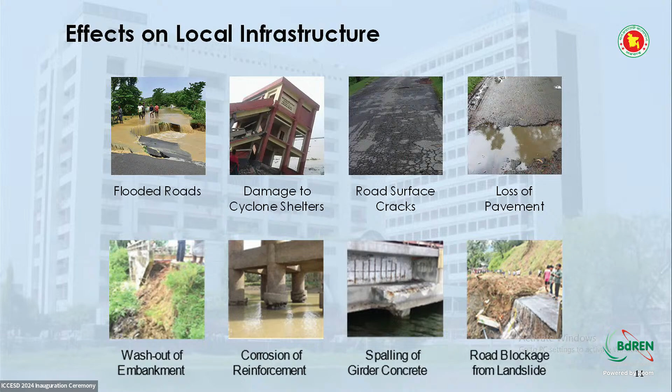Major climate resilient rural infrastructure projects. Recently, the government and also the development partners like World Bank, ADB, JICA, USAID, KFW, so many - even 26 development partners are working in LGED on different development projects.

To face the challenges evolved by the recent climate change impact, LGED is not sitting idle. LGED has taken initiative to integrate climate and disaster resilience in infrastructure design, implementation procedure, and also

by this time LGED has developed new design standards addressing all climate change issues and developed an asset management policy system.

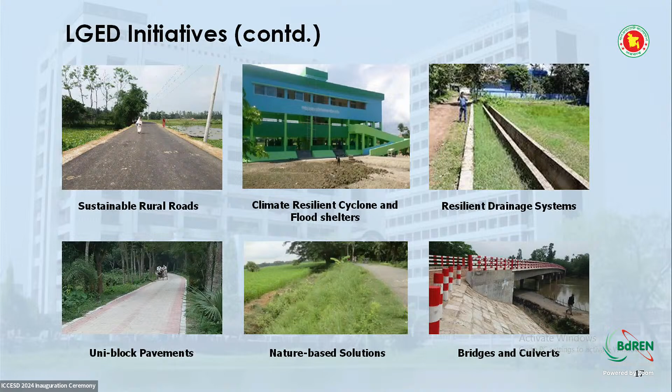Others - nature-based solutions like vetiver grass, we provide on the slope, but it is not much popular. The engineers actually working in the field are not much interested to use vetiver grass. The problem is also there because not everywhere are these grasses available. It is not much expensive, not cost involving. That's why many of us are not interested, on the contrary much reluctant to use vetiver grass alternatives, the nature-based solution.

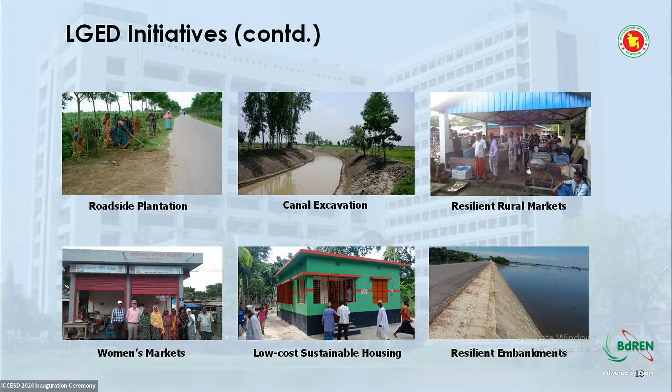You see in cyclone shelters what type of materials we use, which are very much climate resilient.

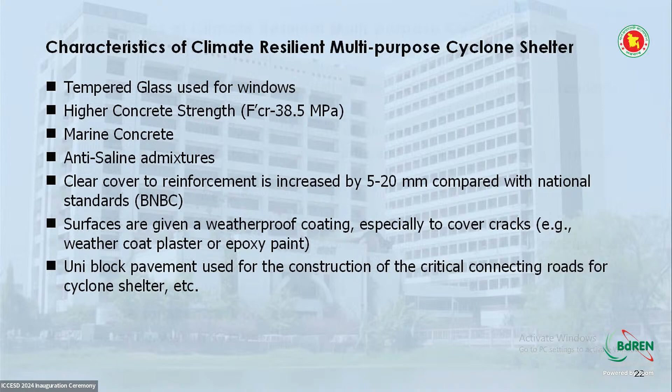And this is all. Actually, I'm not a professional on this particular subject. And I would say, thank you all.

Thank you, everybody. Thank you very much, Engineer Muhammad Ali Akhtar Hussain, for your nice presentation. We have learned few important things from his presentation, how LGED is considering sustainable and resilient development approach for their infrastructure development, which has significant contribution towards the poverty decrease of Bangladesh. He has also mentioned there are few challenges to accomplish these targets. Now, I would like to invite few questions from our audiences.

The open discussion, or you can have any question or observation, please. Assalamu alaikum, I'm Ashraful Alam, Director General HBRI. First of all, I congratulate and give many thanks to the keynote speaker, Mr. Ali Akhtar, Chief Engineer LGED, for his nice presentation. My question is...

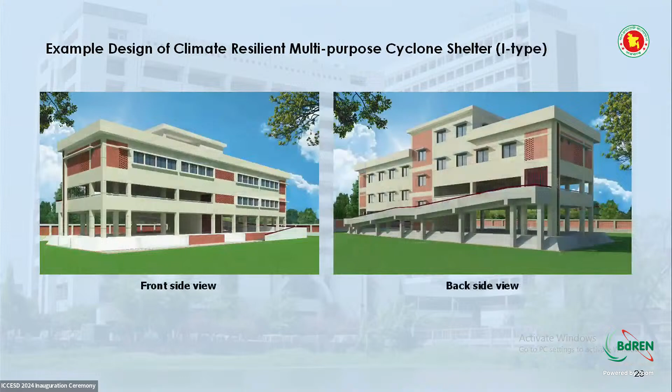As you know, the present government's 2018 election manifesto was Amar Gram Amar Shahar - that all the villages will be like the town, that all the villagers should get all the facilities which the urban people get. But in your presentation, these 5 years, as per the government manifesto, the government decided to increase the villages to convert into urbanization. But in your slide, the result is negative. What is the reason? Do you have the source of that result? Thank you.

Thank you so much, Mr. Ashraf. Reason, definitely, there are some reasons. One of the reasons is the intrusion of rural poor people to the cities. It is actually decreasing because of maybe erosion, less saline affected area. Salinity intrusion, recently, is not taking place. In Satkhira, Bagerhat, 10-15 years before, it was very much acute, and scarcity of drinking water. Maybe the migration of the rural poor to the city areas took place very seriously, but recently, last 10-15 years, we did not see much erosion or much saline affected areas.

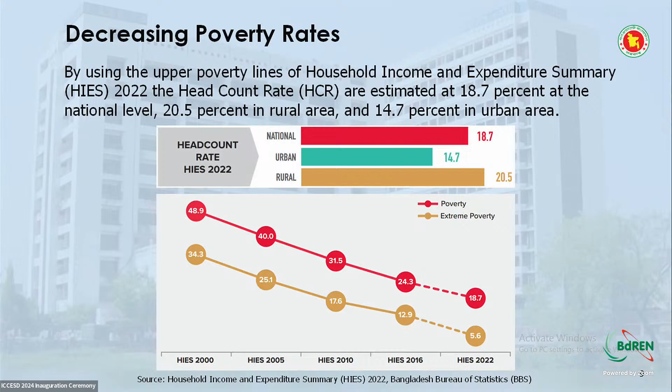Sir, I would like to supplement. This is Mohammad Jamanur Rahman, Superintending Engineer, Department of Public Health Engineering. In response to the question of Mr. Ashraf, I would like to supplement with you. Sir, you are very correct - urbanization is not directly related to the other factors.

We are working for supplying safe drinking water for the coastal people. We are targeting 4 parameters: one is Smart Bangladesh, second is Amar Gram Amar Shahar, third is SDG 2030, and the last one is 2041, in which you will achieve developed country status. The government of Bangladesh is investing a lot of money. At present, DPHE is operating one project of cost around $1 billion, 8,850 crore taka, in order to achieve the SDG, as well as Smart Bangladesh, Amar Gram Amar Shahar, and Vision 2041.

Moreover, the government of Bangladesh puts great concentration on supplying safe drinking water for the coastal people. For this we are implementing three special projects for the coastal people to ensure safe water supply. You are very correct, that is why the migration from coastal areas, rural areas, or interior remote areas is less. And another, the third one is maybe the income generation - income generating activity is also increasing in the rural area.

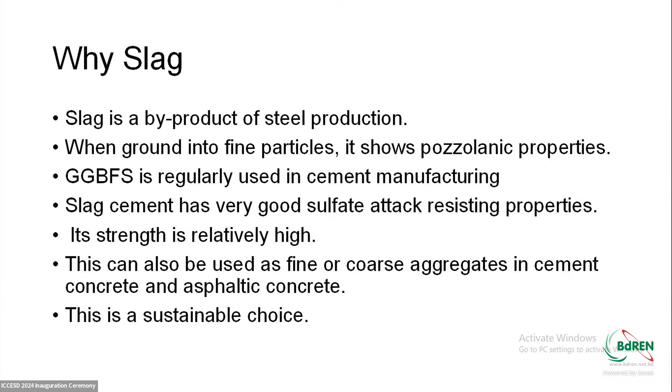Now, why don't we have any blast furnace slag in Bangladesh? Because everything is in Bangla. Why? I don't know. There's something wrong, anyway, I don't know. Can you change the font? Just select it and change the font. No, I didn't write it in Bangla, it was in English, so go to home and change the font type.

Anyway, I'll explain. There are two routes of steel production: one is primary route and another is secondary route. Primary route is where steel is produced from iron ore, collected from iron ore, and that is the primary route. For primary route steel production, a blast furnace is needed.

Another is the secondary route, where steel is recycled. Scrap is used as raw material for steel production. In the present-day world, 90% or more of steel is produced via the secondary route because that is more environment friendly.

In secondary route, a great quantity of furnaces are electric arc furnaces. In our subcontinent, induction furnaces are also used, but the majority of furnaces for secondary route are electric arc furnace. In that process, for further refining, ladle refining furnace is also used.

Now, the problem is why blast furnace slag is kind of a standard to be used in cement, because of its chemical properties and chemical composition that can be more controlled. The problem with electric arc furnace and ladle refining furnace slag is that since the raw material is scrap, it depends on the type of raw material used to produce the steel in the secondary route.

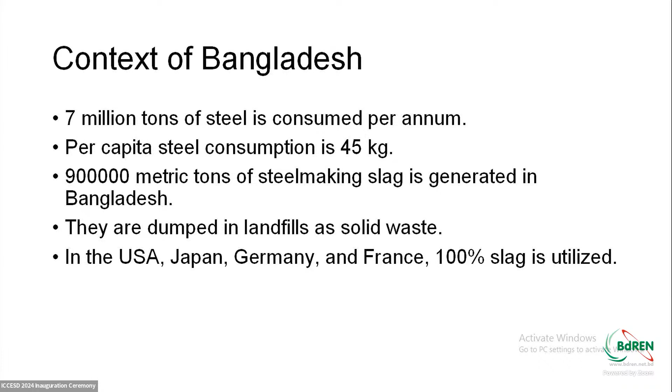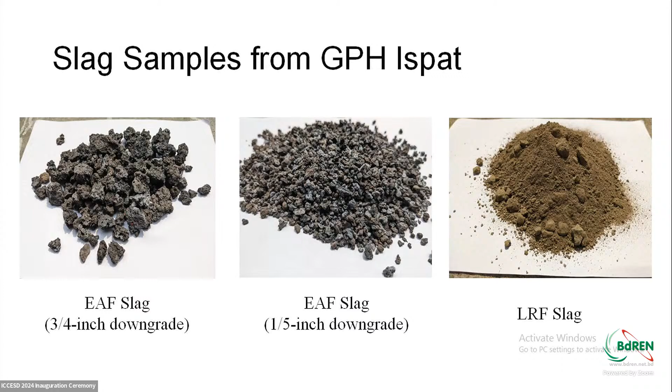Now the slag we collected was from GPH Ispat; the collaboration was with GPH Ispat. The electric arc furnace slag was crushed in different sizes, like 3/4 inch downgrade and 1/5 inch downgrade, and LRF slag was collected in powder form. We used XRD, and found that for electric arc furnace, a great portion of the component was iron oxide, like magnetite, wustite, and some silicon oxide.

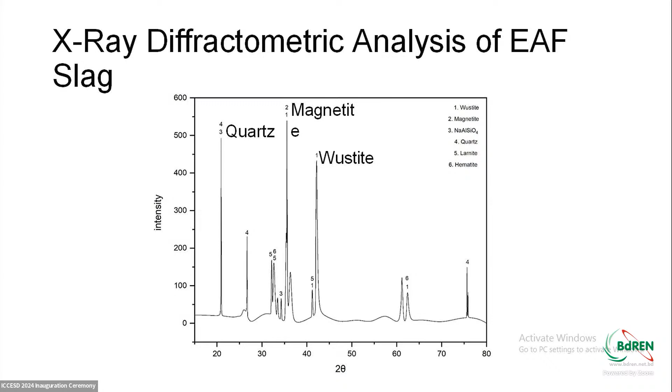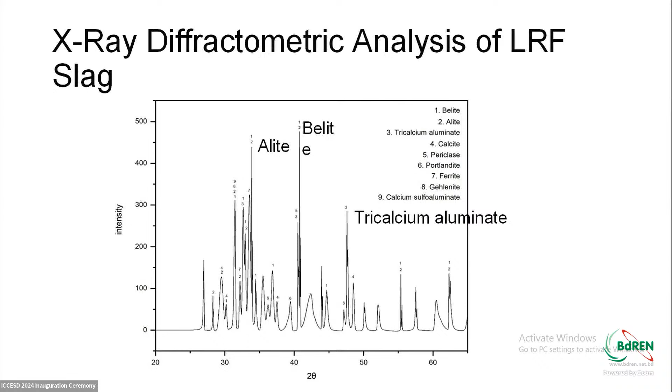We'll show other components too. For LRF, interestingly, it has chemical composition very similar to clinker. It has belite, which is dicalcium silicate, and alite, which is tricalcium silicate, and tricalcium aluminate, which are also the compounds of cement.

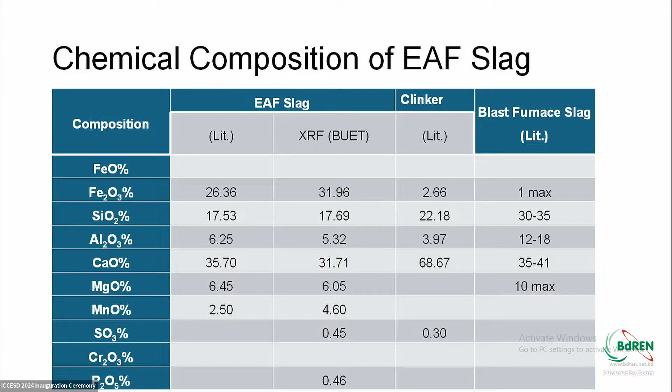Now, if we compare LRF, we find there is very little amount of ferrite. The majority is lime and some silica. If we compare with clinker, this is comparable, LRF slag.

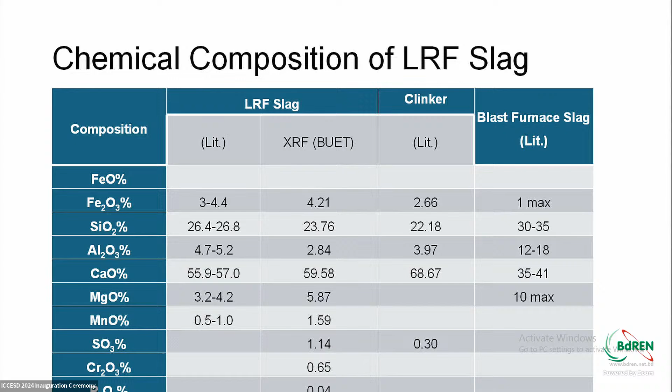Now, we tried to utilize the slag, LRF and EAF slag, in cement production. The process was like this: with clinker, gypsum was added, then slag was added in powder form. Both EAF and LRF slag were pulverized, and the particle size was lower than 150 micrometers.

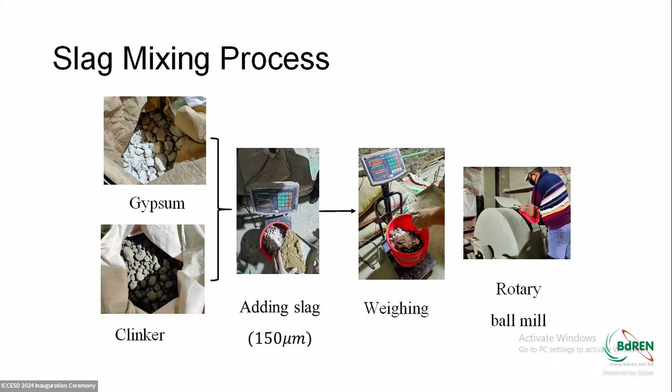It was then added in different quantities depending on the mix design. In a small rotary ball mill, we mixed this gypsum, clinker, and slag. So the final product was cement.

The mix design was like this: clinker was replaced by 5% to 30% LRF slag. In sample number one, there was no replacement, gypsum only. In samples 2 to 7, there was replacement by LRF slag from 5% to 30%, and in samples 8 to 11, clinker was replaced by EAF slag from 5% to 20%.

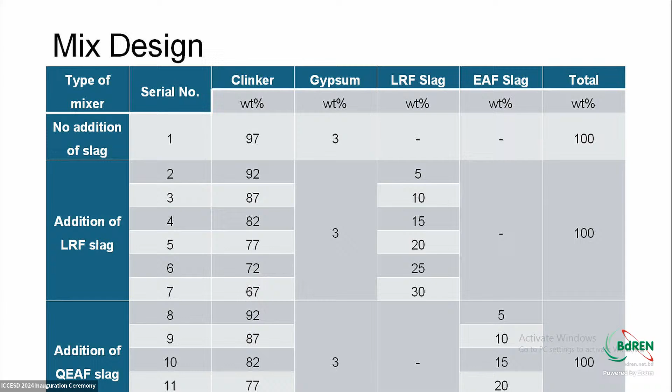Now, after replacement, the chemical composition became like this. In LRF, the ferrite percentage was comparatively less. And we see that when EAF slag was used, ferrite percentages increased with higher portions of EAF slag.

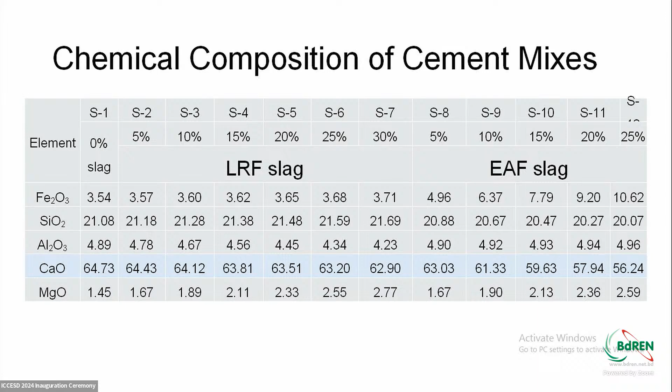And if we see the lime percentage, it remained relatively similar to clinker in case of LRF slag, but lime percentage was reduced in case of EAF slag.

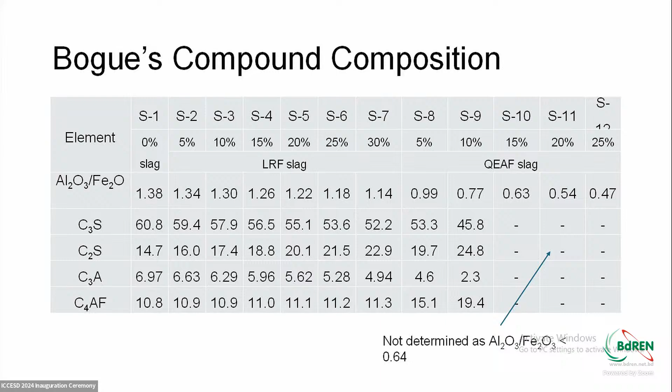Now, if we calculated the bogue compounds, that is belite, alite, aluminate and aluminoferrite of cement, for LRF slag they were all within permissible limits, but for EAF slag, which is electric arc furnace slag, the ferrite aluminite percentage was so low that ultimately other compounds could not be determined, because the formula we used required that the aluminate ferrite ratio must be greater than 0.64.

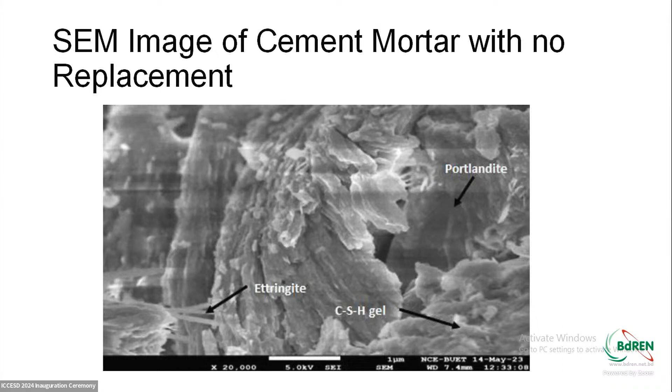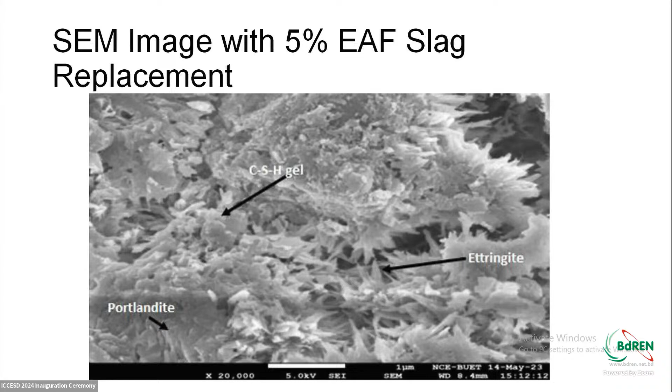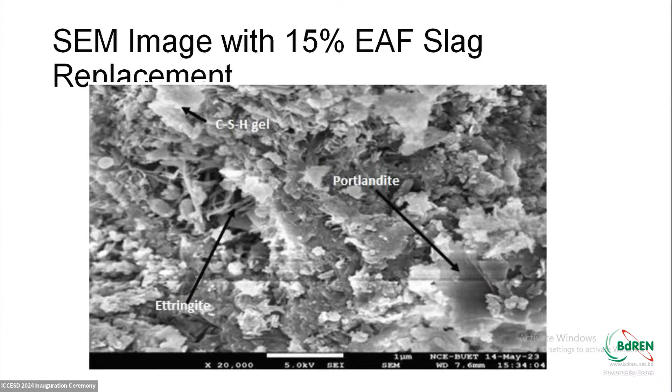So now when we replace with 5% EAF slag, we can see that ettringite is more predominant. CSH gel becomes a little less. Portlandite is also observed. Then with higher percentage of EAF slag, the amount of Portlandite actually increases, which shows that the material is becoming more heavy, density is getting higher. But after a certain amount of replacement, it may show expansive property, which is not good for durability. Similar nature is found in 15% replacement of EAF slag.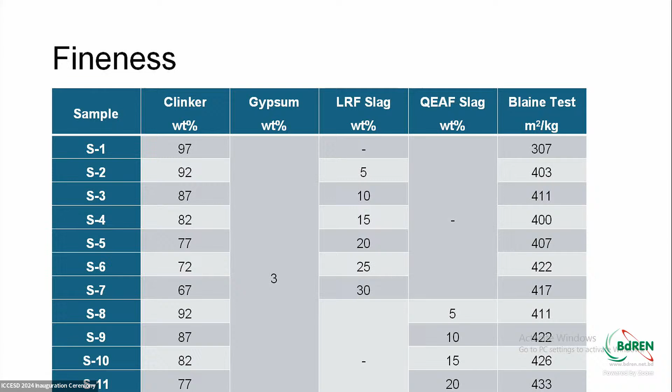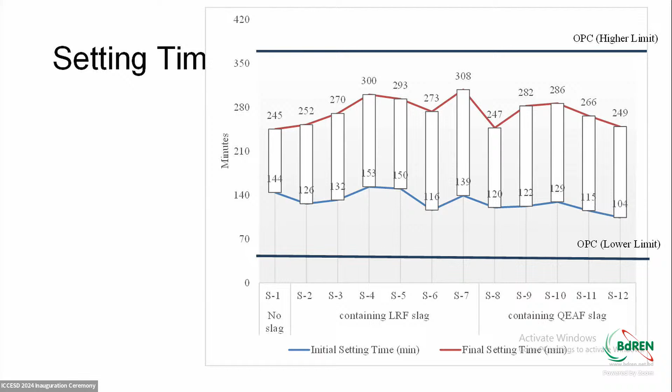Setting time, we measured setting time. It was within the limits, even for OPC, ordinary Portland cement limits. Soundness was also within the limit, but if we increased the EAF slag more than 25%, then it becomes a problem. Expansive properties are then observed.

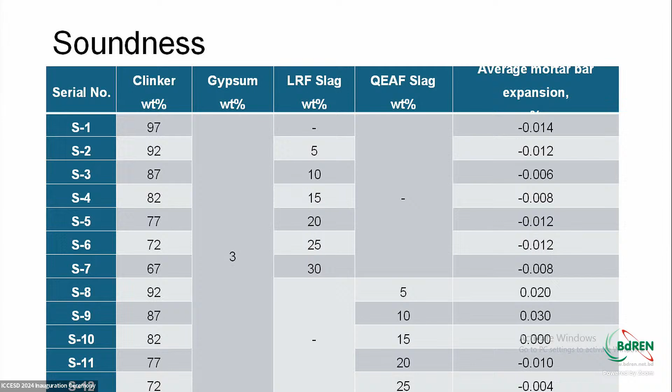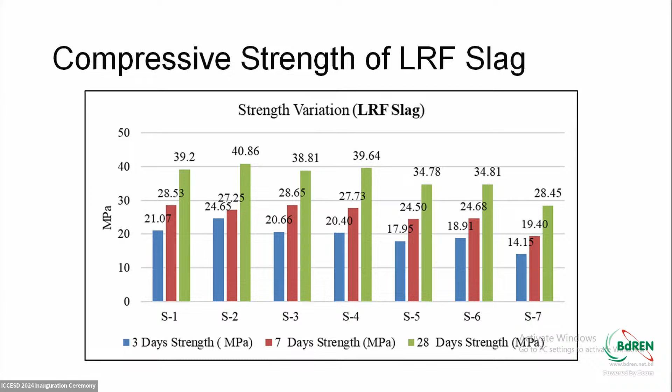In terms of strength, we find that with higher percentage of slag, strength actually decreases, but we can achieve comparable strength with OPC with up to say 15% replacement of LRF slag. In case of EAF slag, again, strength is comparable, but it decreases much more with a higher rate, with higher amount of EAF slag. So both LRF and EAF slag can be used as replacement of clinker without adversely affecting the cement properties.

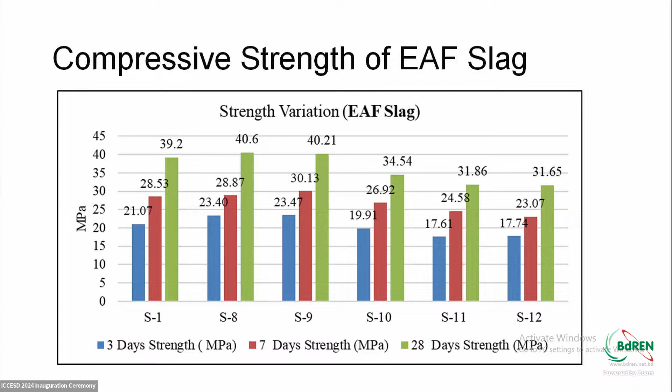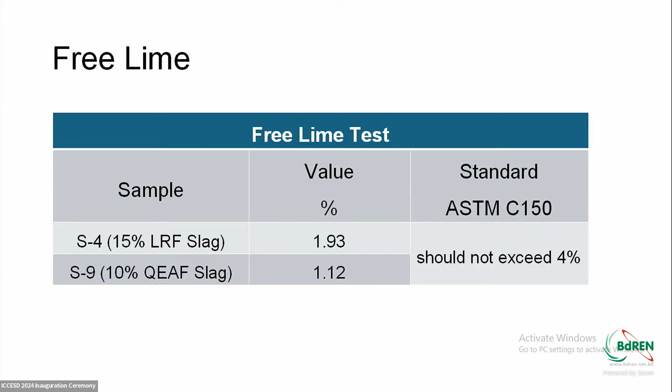But LRF slag is much more chemically similar to clinker. In literature, we found that free lime is a problem for slag, particularly for LRF slag, but we found that for our samples, that was within limit. And loss on ignition was also within limit. So that was all about clinker replacement in cement.

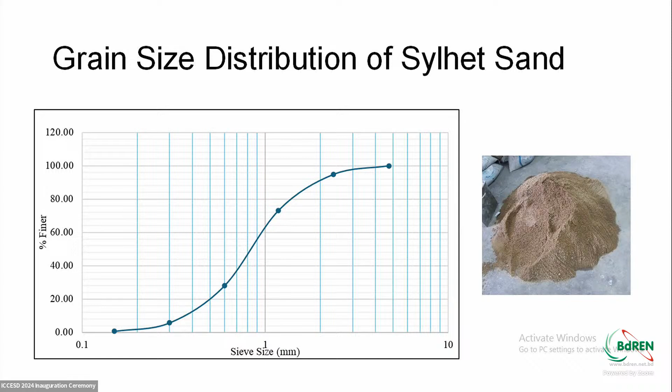Now, we also studied if EAF and LRF slag can be used as replacement of fine aggregate or coarse aggregate. For that, if we see the grain size distribution, this is the grain size distribution of Sylhet sand, and the samples we used for fine aggregate replacement of EAF slag were much finer compared to Sylhet sand, which is not good.

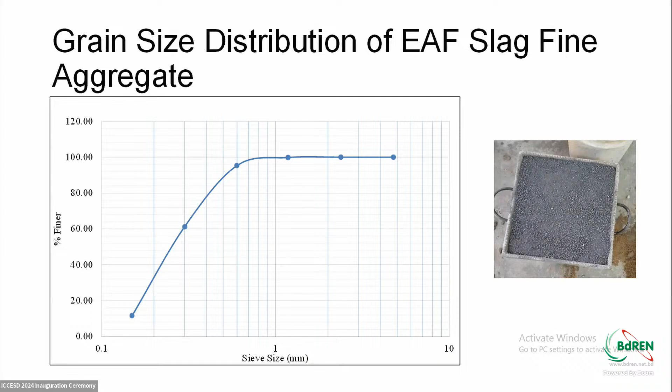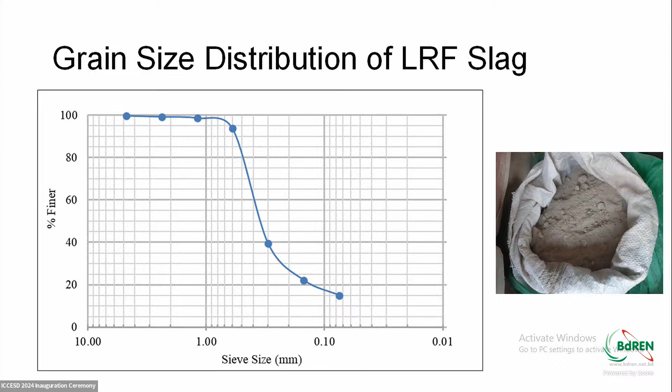And LRF slag was already in powder form, and we can actually make coarse aggregate with EAF slag, but with LRF slag, coarse aggregate is not possible; it is always in the powder form. So LRF slag can be used as replacement of fine aggregate or as clinker, but not as coarse aggregate. Again, the particle size is much finer compared to Sylhet sand, which is not good.

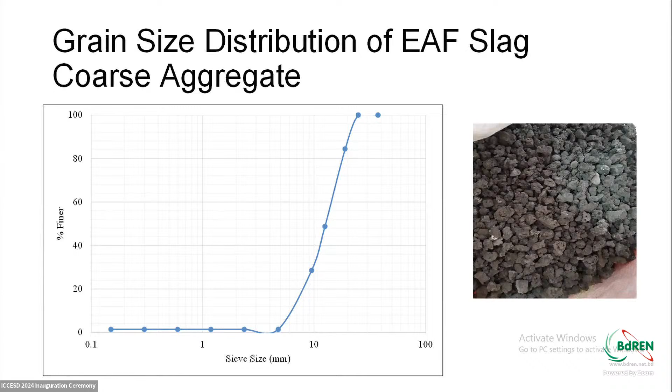For stone chips, this is the grain size distribution, and only EAF slag can be replaced as coarse aggregate. Grain size distribution depends on how we crush it, so grain size distribution can be similar to stone aggregate. And then we use different mixes.

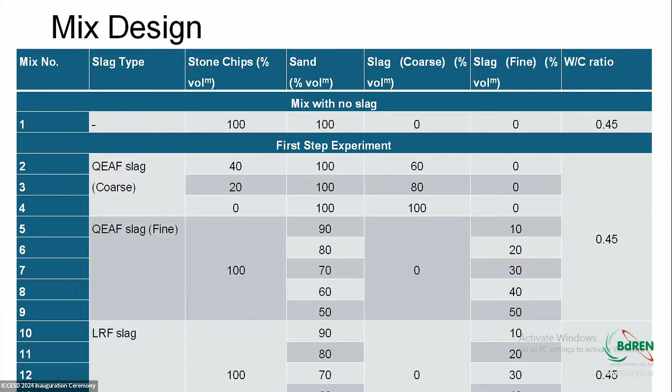In our first trials, what we did is without any replacement of stone or fine aggregate, and then we replaced with EAF slag. We used 60% to 100% slag in replacement of coarse aggregate. For fine aggregate, we replaced 10 to 50% of sand with EAF slag and 10 to 30% of sand with LRF slag. In all cases, we kept water cement ratio at 0.45.

Then in our second trial, after getting some experience, we used EAF slag, replacing both coarse aggregate and fine aggregate in different proportions, like 80% replacement of coarse aggregate and 5% replacement of fine aggregate, and so on, and 100% replacement of coarse aggregate with 15% replacement of fine aggregate together.

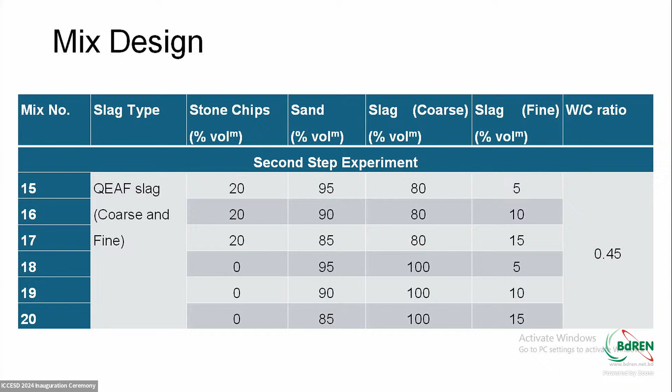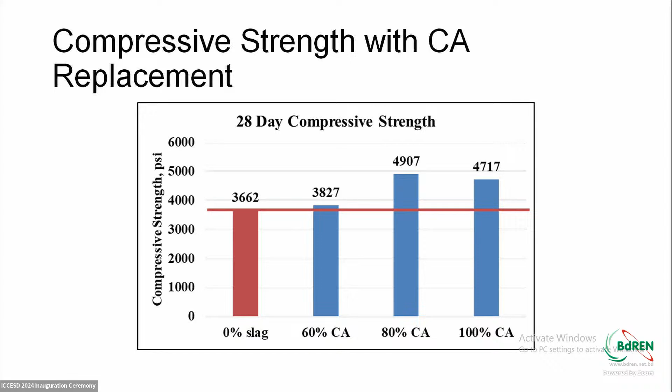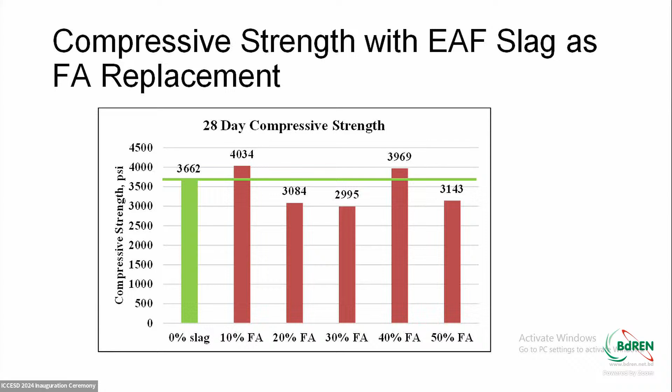What we found is that when we replaced coarse aggregate with EAF slag at a higher proportion, the strength got higher, so coarse aggregate replacement was quite successful. But in case of fine aggregate replacement, it was not like that. It varied because the particle size of EAF slag fine aggregate was much less than Sylhet sand, so we didn't get very good results. The same is true for LRF slag too.

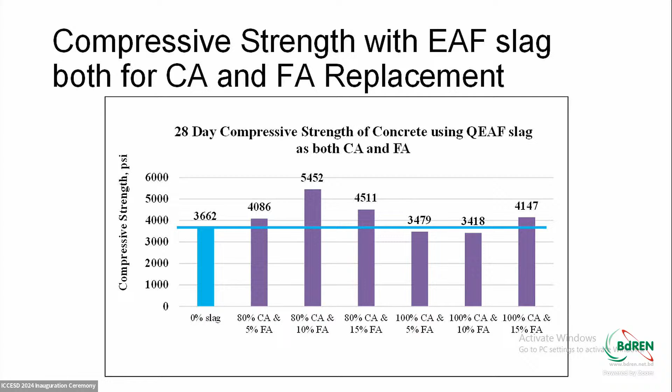So finally, what we can say is that even when we use EAF slag as replacement of both coarse aggregate and fine aggregate together, the result varied. So what we can suggest is that for coarse aggregate replacement, EAF is a very good choice, but fine aggregate replacement is not desirable, number one.

And in case of clinker, it can be replaced for cement production, both by EAF slag and LRF slag. But what we suggest is that since LRF slag has no other use, particularly as a replacement for coarse aggregate, LRF slag should be used for clinker replacement. And EAF slag can be used as replacement of coarse aggregate, both in cement concrete and in asphalting concrete. In asphalting concrete it's already very commonplace, so we were interested in cement concrete.

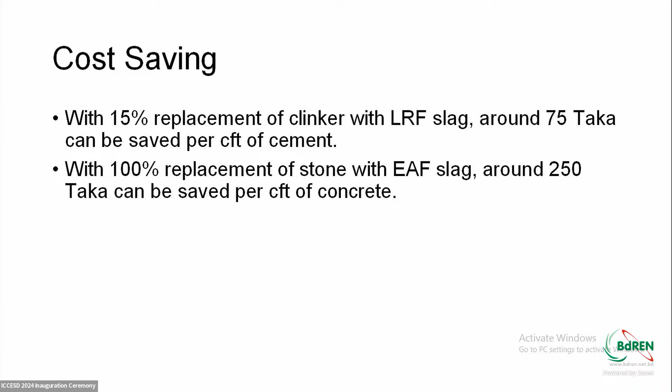So in terms of cost, this is a very rough estimate: 15% replacement of clinker with LRF slag may save 75 taka per CFT of cement, and 100% replacement of EAF slag as coarse aggregate may save 250 taka per CFT of concrete, which is huge, if we think that the slag is free in that case, because it's a byproduct waste.

Environmental aspect is the most important thing, which goes with the theme of this conference. I'll try to give some statistics here. Cement manufacturing is responsible for approximately 9.5% of worldwide carbon dioxide emissions. You all know construction is a very big contributor of carbon footprint. On average, the production of 1,000 kg of cement emits nearly 900 kg of carbon dioxide, and for Portland cement, nearly 1 ton of carbon dioxide is generated for every ton of cement manufactured.

Considering that, if 15% clinker is replaced by LRF slag in cement production without hampering the physical and chemical properties, as we have shown with our samples, then nearly 13.5% less carbon dioxide will be produced for cement production. Production of 1,000 kg of cement will emit 865 kg of carbon dioxide, which is 35 kg less than the conventional process. Not a big gain, but it will still contribute to lessening the amount of carbon dioxide in the atmosphere, and the problem of dumping slag in nature will also be kind of solved.

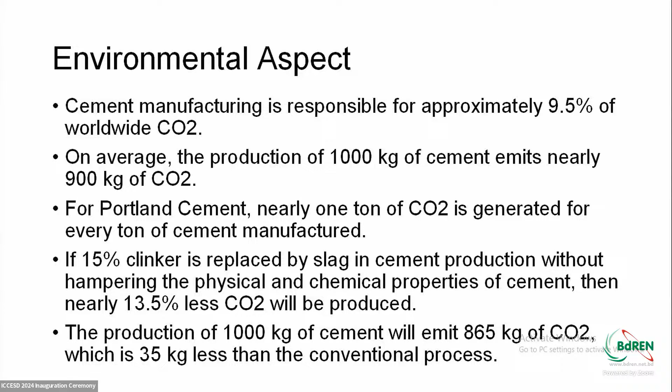I would like to acknowledge RISE, a newly established institute in KUET called Research Innovation in Science and Engineering. Under that institute, we had this industry-academic collaboration between GPH Ispat and KUET. In KUET, the MME department and civil engineering department were involved. Professor Dr. Gulshan Fahmida was the PI, I was co-PI, and Dr. Mohammad Muqtadir Billah, both from MME, he was also a PI. So I acknowledge them. Thank you.